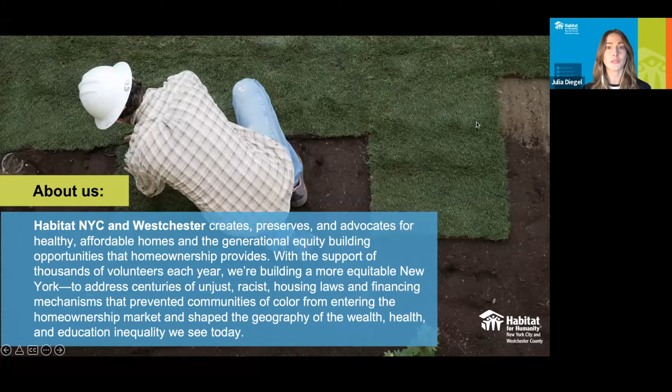Habitat New York City and Westchester, as Ben mentioned, is the hyperlocal affiliate to Habitat International. As a nonprofit affordable housing developer and housing justice organization, we service the 5 boroughs of New York City and Westchester County. Through our vision, we are building a more equitable New York by building more housing, preserving more housing, advocating for more affordable housing solutions, and by leveraging innovative and scalable housing solutions and models, such as community land trusts, which you'll hear more about later, limited equity cooperatives, and rental to homeownership conversions.

Through impacting the affordable housing space, we are providing an infrastructure for equity building that can be passed down to future families and future generations as well. We develop both single family and multifamily housing. And through our preservation program, we provide a multi-pronged approach, which covers both technical assistance and capacity building, financial lending, and construction support services. We serve families who make between 50 to 90% of the area median income.

Many of these communities were impacted disproportionately during COVID and have been facing unjust housing policies that have purposefully and intentionally prevented communities of color from entering the homeownership market and from having access to fair, decent housing. More than 80% of the families we serve are single female heads of household, and more than 95% through our preservation program alone identify as BIPOC.

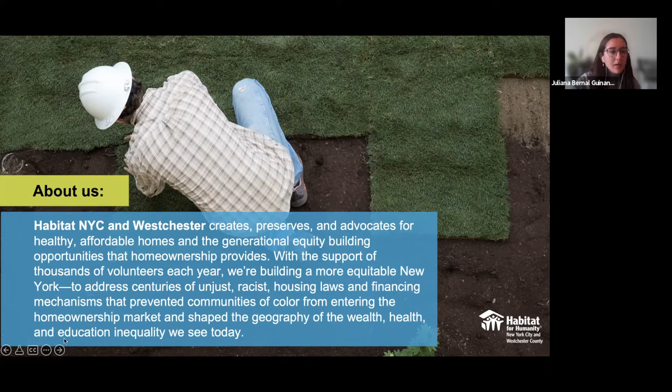Thank you, Julia. Next slide, please. Previous slide, please. Two back.

So why Habitat Net Zero? This is our third cluster of single family homes acquired from NYCHA. The first cluster consisted of 13 homes, all gut rehabs. Our second cluster was a total of 23 homes, 20 of them gut rehabs and 3 new construction. So for this cluster, when the New York City Housing Authority issued a request for proposal for this new cluster of homes, we really wanted to propose something different and innovative.

So for this project, we decided to go all new construction. Sustainability was very important for us, and we wanted to push the envelope here. So we wanted to propose passive house construction. And since these would be all electric buildings, we would be coupling this with solar panels for the homes to be net zero capable.

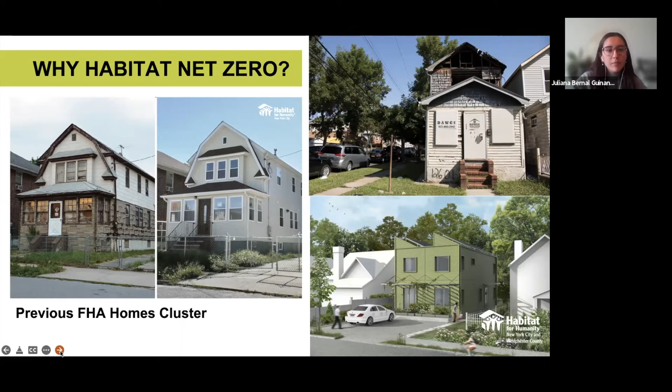So first and foremost, one of the main challenges we have been facing with this project is the lack of economies of scale. Although we are talking about 16 dwelling units, we're also talking about demolishing and abating 13 homes, excavating and building the foundations on 13 sites, and doing permitting for 13 separate sites. So the economies of scale here were basically non-existent. This also coupled with limited subsidy available for the new construction of homeownership units in New York City.

As I mentioned before, the land was acquired from the New York City Housing Authority. We also received subsidy from the New York City Department of Housing Preservation and Development from their Open Door program, which is the only program that they currently have to subsidize the new construction of homeownership units. We also applied for RESO-A capital funding from local elected officials, and we received subsidy from the state, from the New York State Homes and Community Renewal Affordable Housing Corporation. We've also applied for funding from NYSERDA, some of the incentives for green building.

That being said, being able to subsidize this project took a lot of time and effort, and this definitely extended the pre-development timeline. In addition, pursuing modular manufacturing was another challenge we faced. First of all, many modular manufacturers have their sample or template homes. So we were requesting custom homes that would be able to be built with the stringent New York City building code. Therefore, we did go through several modular manufacturers, and each of them has their own specifications and guidelines which we had to accommodate.

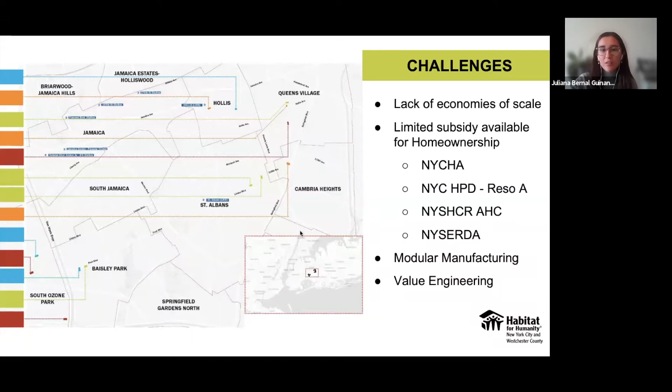Now I'd like to pass it on to Grayson for him to talk more in detail about the design of the homes.

Great. Thank you, Juliana. Again, my name is Grayson Jordan. I'm a partner at Paul Castrucci Architects. We're the architect for the project, and just really pleased to collaborate with this team and Habitat for Humanity in creating these deeply energy efficient homes for affordable home ownership.

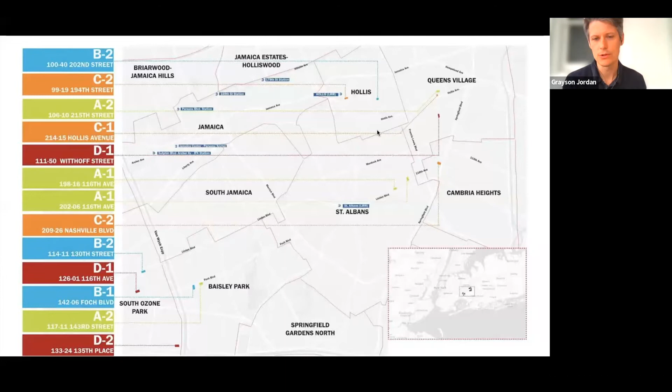I'm going to try not to repeat some of what Juliana said, but a little bit of a recap. So coming into this RFP, we were looking at 13 scattered site homes in Southeast Queens that originally called for renovation. As Juliana said, we identified some significant advantages to going new construction, including the fact that many of the homes were significantly damaged. We saw value in increasing the dwelling units from 13 to 16, and also adding 12 more bedrooms.

And also just thinking about a goal, whether renovation or new construction, is going to be deep energy efficiency that's sort of embedded in our firm's practice. And we do both. We're big proponents of retrofits, but especially for affordable home ownership that's going to be fully electrified, top of mind is going to be really driving down energy costs and operation costs as much as possible. And that's just a little easier to get at in new construction. You have more control, more levers you can pull. So energy efficiency, healthy indoor air quality, and indoor comfort are all a little bit easier of a lift from a new construction perspective. If we go to the next slide, please.

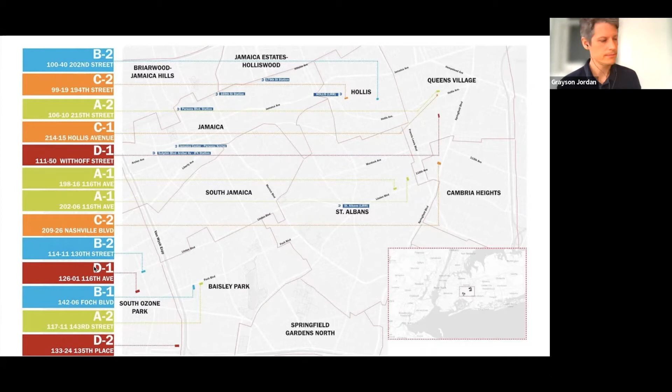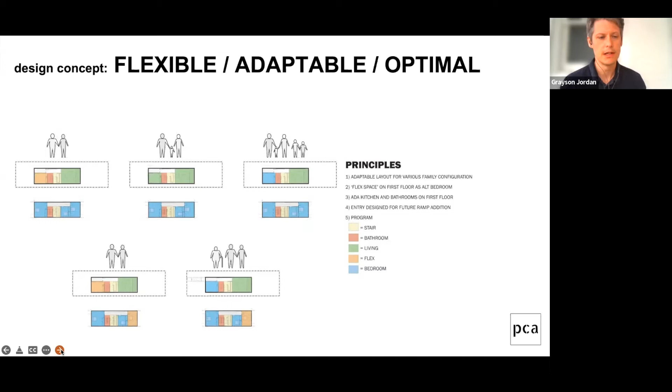Another advantage of the new construction, besides maximizing floor area, bedrooms, and unit count, is the ability to optimize the layout to different family configurations. We know that New York City families aren't one size fits all. It could be a single person, could be a couple, up to a multi-generational household. And by doing new construction, we're able to make a few small moves that allow us to accommodate that sort of adaptability and flexibility. So we go to the next slide, please.

So here's a sample layout showing some of the small things that we're able to do to accommodate different types of families. First of all, these are not flood zones, so the homes are built quite close to the ground, very easy to adapt with a handicap ramp if needed. In fact, one of the homes will come on day one with a ramp, and that helps with mobility impaired and aging in place. Another important key point for aging in place is the idea of having a full bathroom on the ground floor and a flex room, which you can see in the front. Flex room for one family might be a dining room or living room. For another family, it might be a bedroom for an aging grandparent.

Finally, with all affordable housing, we're always looking to maximize the resources we have, whether that be monetary or spatial. In this case, they're not large homes. So taking the living rooms, putting them in the back, opening them up to rear patios and gardens, and extending that living space throughout much of the year, and just sort of maximizing everything that these sites have to offer. Next slide, please.

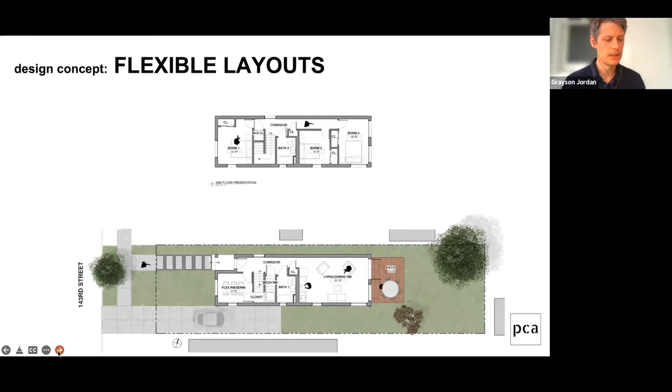So as Juliana said, once we're thinking that we're going to do new construction, we know we're not going to do 13 or 16 bespoke homes. It doesn't make sense from a soft cost perspective. Also, it doesn't make sense from a hard cost perspective. So that quickly got us into this idea of repeatability, scalability, and modular. So to recap some of the benefits of modular, you're going to increase quality control. Everything's done in the factory. We can do a mock-up in the factory on the first critical detail, and then have that same detail repeated 16 times in factory settings.

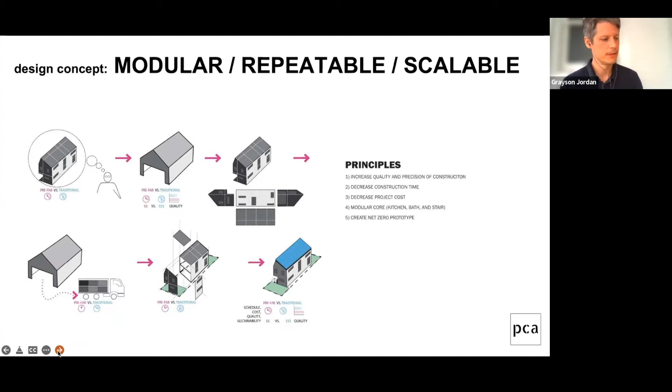We're going to decrease construction time. There's some financial benefits to that as well. And there's also the opportunity to begin to establish concepts and prototypes that can be repeated. So to demonstrate ways that we can build to passive house standards, be net zero capable for affordable home ownership, that can be repeated on different sites throughout urban and suburban scales. Next slide, please. Okay. I'm not going to delve too deeply into the details of modular, but I'll go over the high level points.

As Juliana mentioned, each manufacturer has slightly different ways of putting their buildings together. So I would say if you're working in modular, it is important to team up with a good modular company from day one so that you're designing to their system. The other thing you need to know is how you're getting your mods from the factory to the site. You're going to want to map out that entire route because there's going to be pinch points, tunnels, bridges, overhangs that might have design implications.

In this case, the mods are fairly simple. There'll be 2 mods per home, a first floor and a second floor. The mod comes nearly fully constructed. The entire interior is finished, all equipment, finishes, plumbing equipment is all installed in the factory. Windows and doors installed in the factory. Structure, sheathing, and air barrier all installed in the factory.

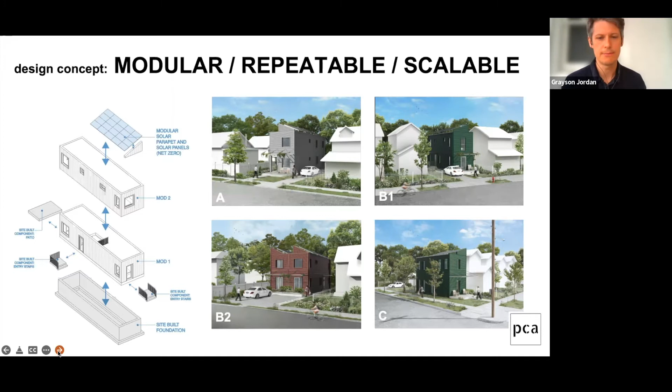It's delivered to the site. Dropped on a site-built shallow foundation that is really just a crawl space and a service space. One mod is craned onto that foundation. The second mod is craned on top. We'll heal the air barrier all around, install exterior insulation and finish, and do a few site elements such as solar panels, patios, and steps. Next slide, please.

Okay, so knowing that we don't want to do 13 or 16 individual homes, it doesn't make sense. We want to achieve some scale. We also don't want to do one. We're working with 4 different zoning districts, all different size lots, different orientations. And if we chose to just do one mod, then we'd end up with the absolute smallest mod type repeated over the 16 homes, and we wouldn't begin to get all the benefits of increasing the dwelling unit size.

And so what we landed on, starting with the zoning study, we figured out what's the maximum floor area for each site, what's the maximum width, depth, height, and began to create these sort of Venn diagrams, and found that really there's 3 main types that would work here: an A, B, and a C type. That got split into 4 types: A, B1, B2, and C. And B2 is just 2 of B1s. And that's how we achieve some economy of scale while also maximizing the number of units and floor area size.

What you're seeing here is an early study where the idea is to create simple, uniform first and second floors, and then to have adaptable attic and roof lines that conform to site conditions. So we'd have an east-west mod type and a north-south mod type that would allow us to really maximize our solar area and would give each site a slightly different aesthetic look. That was unfortunately something that did have to be VE'd out for this project, but might be something that we would explore for another prototype of a similar project. Next slide, please.

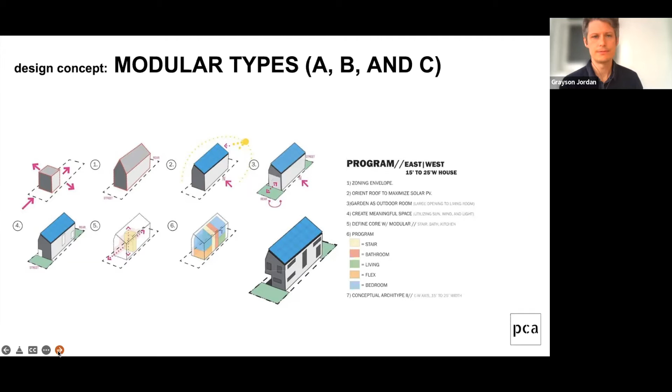Okay, passive house approach. So pretty much from day one, we were working with passive house. It's something that we do in the firm for all of our projects. We are going to be using passive house not only as a benchmark, but as a design tool. So we're using the energy modeling tool fairly early on in the process, thinking about the different levers we can pull to get to our benchmark. I suspect a lot of folks are familiar with the standard, so I won't get too much into detail.

Triple pane windows, the usual systems you'll see in Passive House that Tristan will talk a bit more about, your ERVs, heat pumps, heat pump hot water heater, and then solar panels, which allow us to, using Passive House, drive down the energy load as much as possible and then supplement with solar to get to net zero capability. Next slide, please.

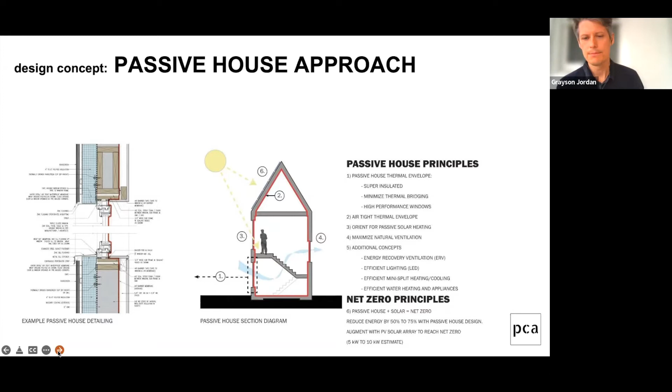And that's just one example of when you're integrating this sort of Passive House energy model into your design practice, that we're able to find low-hanging fruit and really embed energy performance into the design so that we're not having to over-insulate in one place because we haven't put in the right window, for example. So we're really finding the right balance between economy, design, and energy performance.

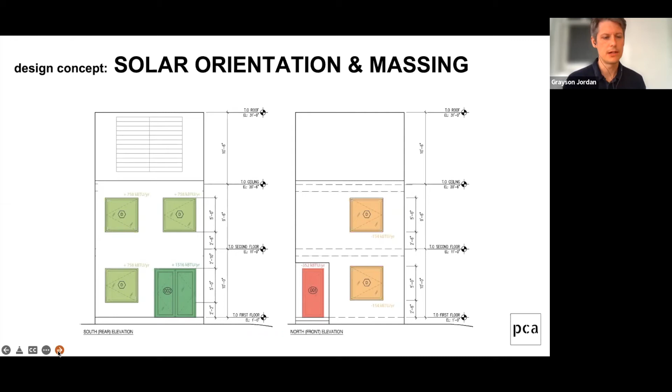And I don't know that I talked a lot about it, but just before I hand it off to Tristan, you'll notice that instead of the optimized roof that changes on each building, we ended up with this solar parapet with the solar array that matches that line that's installed on each of the homes, which takes the Passive House level design and brings it to net zero capability. So with that, thank you, and hand it over to Tristan.

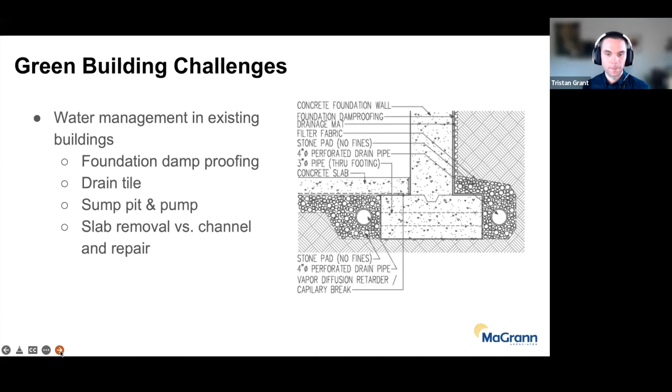Quickly touching on system performance, we didn't do anything incredibly out of the ordinary. If you're familiar with high performance electrified buildings, these are pretty standard systems and performance values. We did go with Zehnder ERVs, which are kind of top of the line for those components.

We had ducted cold climate air source heat pumps with a COP of around 2 at 5 degrees Fahrenheit, and hybrid tank heat pump hot water heaters. What is maybe less conventional is the inclusion of on-site solar at all of these sites.

So that's around 85 kilowatts DC throughout the whole cluster, mostly averaging around 85% system performance, and using microinverters rather than central inverters, avoiding complications you can get with shading and site limitations cutting down production more significantly.

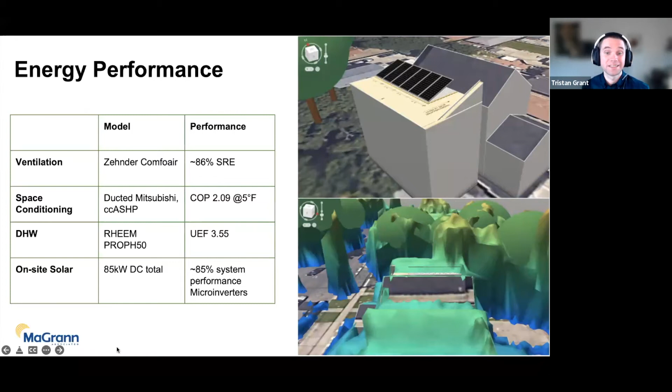Because of the modular nature of the cluster and the project, the mandatory inspections are split between the factory and on-site. DOS requires the New York State QA/QC compliance inspections that happen through a third-party agency. There's a separate HERS rater, not through our organization, contracted by the factory, who they use frequently and is more plugged into their schedule and processes.

So much of our open wall insulation and air sealing inspections happen at the factory. That factory setting also makes it easier to track the use of materials and products required by the Indoor airPLUS program, so in some ways that has made accountability and tracking for that program easier.

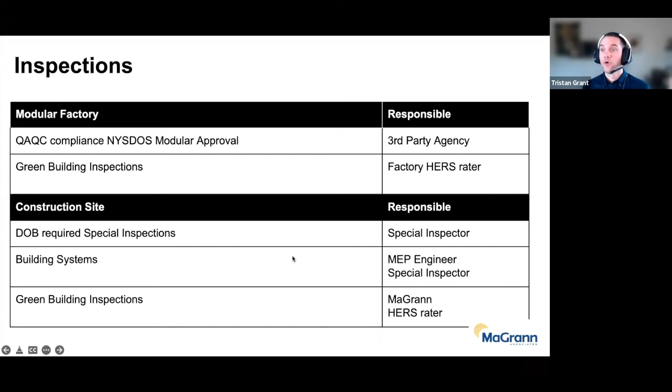And then on site, we have the DOB required special inspections, the building systems by the MEP engineer and the special inspector, as well as our final green building inspections, our final and probably a second rough stage after it gets delivered to the site. We do plan to have some preliminary blower door testing before the siding goes on and things are brought to that full final condition.

I know there's a lot going on here, but this is what I personally have a lot of fun with, which is the numbers. We've broken this out by the building types, and we have the pre-PV HERS score. The HERS score is performance-based; you can think miles per gallon for homes. The lower the score, the better. 0 is a net zero energy home. Negative is you're actually producing more.

Most of the Zero Energy Ready Home targets are in the low to mid 50s for these buildings, so these are all well exceeding the requirements of that program before we account for PV. After PV goes on, many of these buildings are hitting or exceeding net zero, and some aren't. That's largely due to the on-site solar resources, as well as the size of the roof and what we're able to fit on that building.

The next column looks at the projected electric utility cost, ranging from 1,500 to the low 2,000s, a pretty good improvement from standard apartment building stock that you can find in the city. But it gets really interesting when we look at the impact of the on-site solar, and we see the net electric utility cost ranging from zero up to about 1,000. So most of these buildings are going to have pretty marginal electric utility costs, which fits right in with Habitat's priorities and goals.

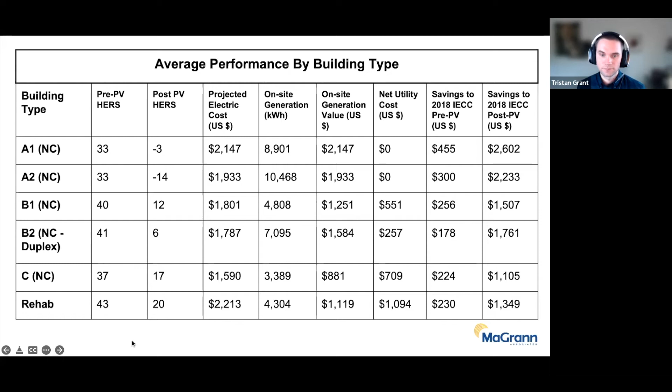Thank you, Tristan. How to get involved. So there's a number of ways if you have an interest in working with us to learn more about Habitat, but also to be able to support what we do and to make what we do possible.

So our first and upcoming event is our Women Build Luncheon. Women Build is one of our more signature annual programs and events that brings together women and men who believe in and support affordable housing, and also working to promote diversity both within real estate and housing and across. On June 8th, we are bringing back our luncheon in person for the first time after COVID.

We'll be hosting an incredible group of panelists, including Sherry Wang from the Urban Investment Group at Goldman Sachs, Doreen Bartoldus, who is the president of National Association of Women in Construction, along with Ebony Young, who is the deputy borough president of Queens.